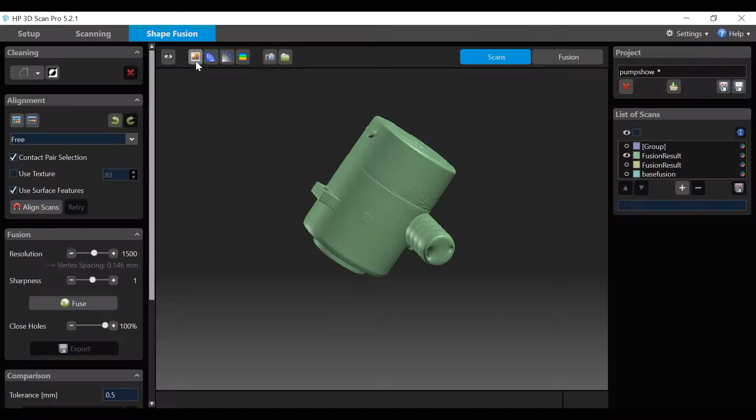This is part 3 of the video tutorials, which will demonstrate the scan alignment and fusion step of HP's 3D Structured Light Scanner Pro S3.

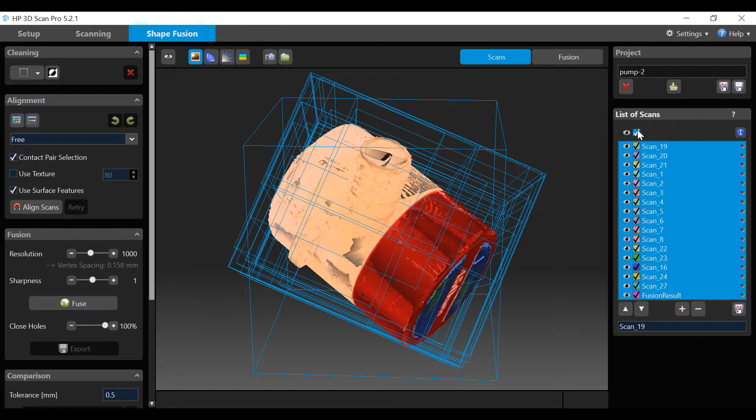Move to the Shape Fusion tab in the software. The Shape Fusion menu provides functions to clean, align, and fuse multiple scans into a single 360-degree model, then compare scans and measure distances if desired. The fused object can then be exported in various formats for 3D printing as an example.

Let's begin with some basic navigation. Further details are available in the HP online instructions.

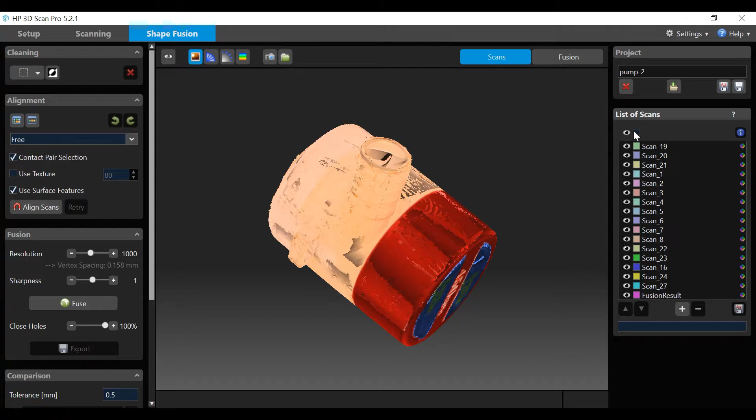Use Shape Fusion. Immediately under the alignment header, there are 4 icons: 1D and 2D, and undo and redo buttons. After selecting multiple scan images, you can use the 1D and 2D buttons to view and arrange them for easy manipulation. The redo and undo buttons work the same as similar icons in Windows applications.

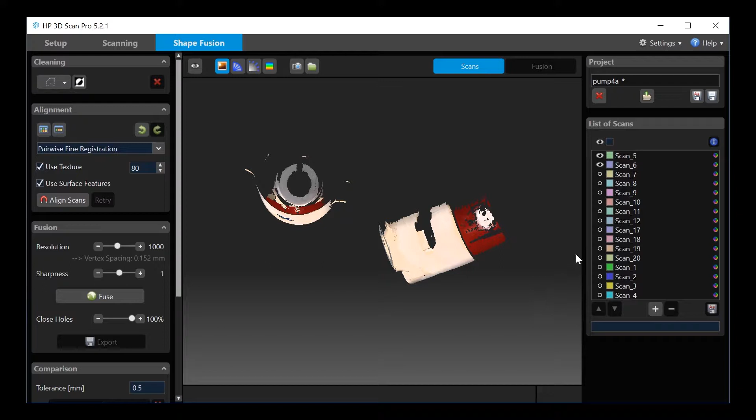Before getting into actual alignment and fusion, let's save the scan results as a project. All the scan files will be listed on the right-hand side of the screen. Click on the top selection box to select all scans. Click the Save Project As icon, name your project, and select location where it will be saved.

Close the project. Use the Load Project icon to quickly bring back any project into the working area of the software.

Another useful feature is the Import-Export function. Files can be exported in a variety of formats, including OBJ, STL, PLY, and 3MF.

Select a file and click the Export icon. Select your file extension and the location of where you want the files to go. Import works by dragging and dropping from Explorer or by using the plus sign below the list.

Lastly, you can click on a scan to view the additional menu options. Right-click on a scan to view menu. The most common ones used are Combine and Uncombined scans, which will be discussed later in the tutorial. Also, the Scan Properties icon displays all the mathematical properties of the scan.

The HP software does a great job of automatic alignment. Further mastery of this part of the 3D scanning process will yield better and better results as you use the scanner. Let's do some scan cleaning.

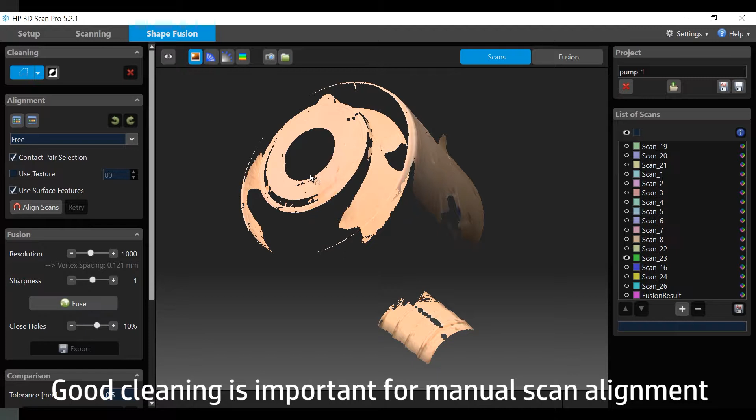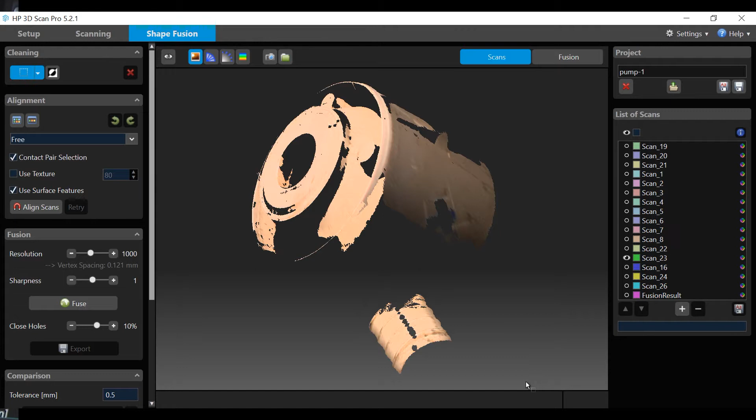Select a scan from the list to display it in the scan window. Move the scan around to detect any area of unwanted noise or scan interference. Click the drop-down arrow in the cleaning selection area and choose Rectangle Selection. Using the left mouse button, draw a rectangle on any area of the scan to be removed. Now click the red X to remove the area.

Now choose Polygon Selection and left mouse click to draw a shape. When finished, right mouse click. Click the red X to remove the area. The polygon selection is the normal selection when doing cleaning.

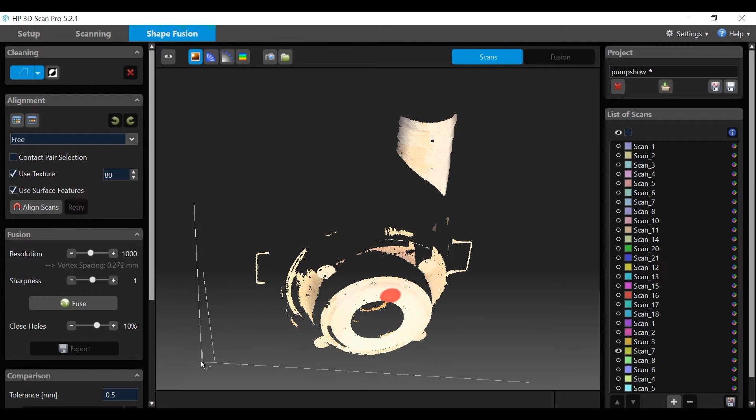Finally, select an area using the polygon tool and highlight an area of the scan you want to keep. Click the Invert selection. Clicking the red X in this instance will remove anything not selected.

Caution: you cannot undo cleaning, so do not save your project if you have modified any files in error.

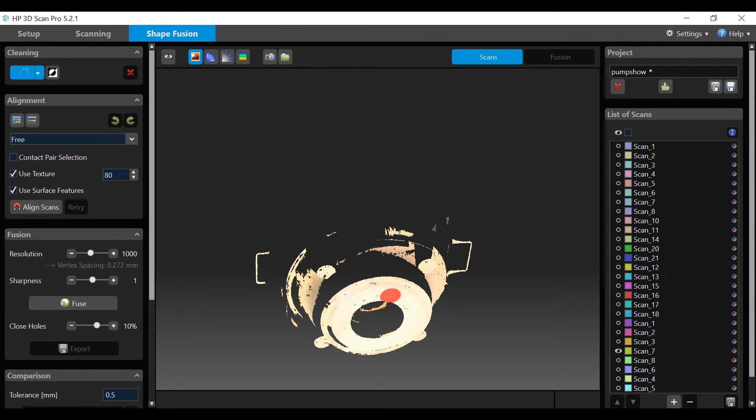Once you are satisfied with the cleaning process, proceed to scan alignment. During scanning with the automatic turntable and manual scan sequence, the software will align the scans automatically, where there is sufficient overlap between neighboring scans. Let's look at the finished scans and see what additional manual alignment may be required.

The alignment selections are free, around axis (not discussed here), pairwise fine registration (not discussed here), and global fine registration. Using free alignment, click the Use Texture and Use Surface Features boxes.

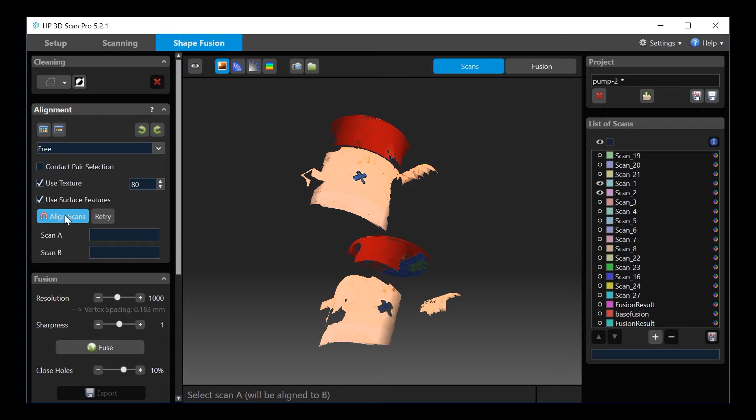Looking at the two scans in the scan window, manipulate them to orient for alignment. Click the Align Scans button. The cursor changes to a magnet icon with the letter A. Click on the scan you want to align, and the cursor changes to the letter B. Click on the scan you want to align to, and let the software process.

Next, let's look at contact pair selection. Pick two scans with unique features. Click Contact Pair Selection and click the Use Surface Features box. Click the Align Scans button. The cursor changes to a red circle.

Pick an area on the scan to be aligned and click the left mouse button. Now pick the same area on the scan you want to align to and click the mouse button. The software displays a line between the 2 points and processes using the features selected as reference points.

As you are successfully aligning scans, it is normally helpful to combine the scans to temporarily group them. Select 2 or more scans in the list of scans by checking the selection boxes. Right mouse click and select Combine Selected Scans. This groups them and allows you to use them as a single scan. Click Uncombine Scans to reverse the process.

Once you are satisfied with the cleaning and alignment process, select Global Fine Registration from the Alignment drop-down menu. Click Align and allow software to process prior to fusion. This is always the last required step prior to fusion.

When ready to fuse, make all scans you want in the fusion process visible. Start with a small resolution value, as fusion is a highly computational step, and higher resolutions will take longer and consume more memory. Set the sharpness value.

Default is 1. Higher values add noise. Negative values smooth the mesh. The Close Holes option will fill in gaps. This can be adjusted so you can set the density or percentage of the gap that needs to be closed.

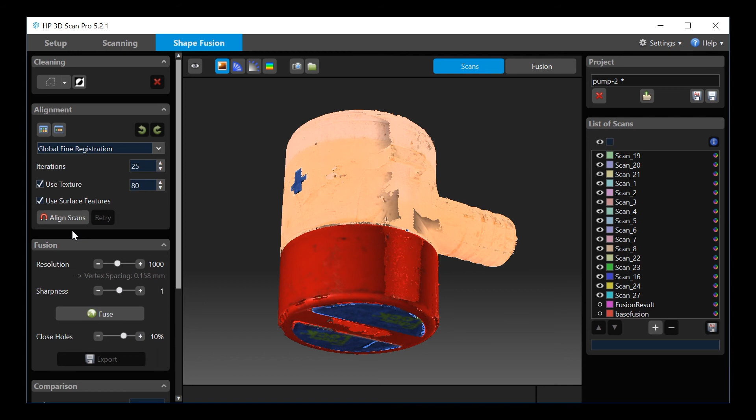Click Fuse. When fusion is complete, you can add it to the project file by clicking the Fusion Result Add to List icon. Don't forget to save your project file.

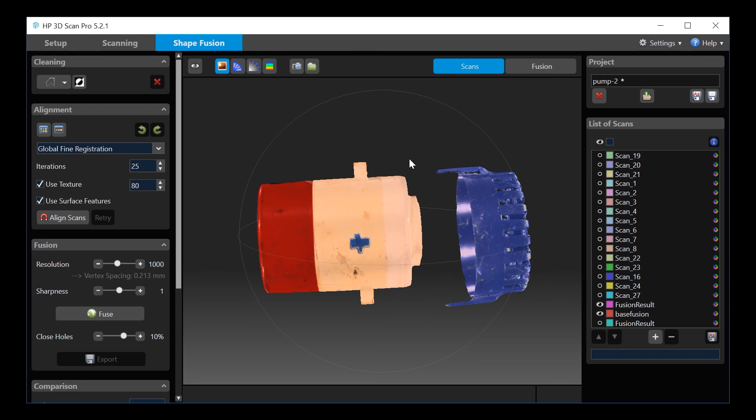This concludes the tutorials on the setup and operation of HP's 3D Structured Light Scanner. Continued use and experimentation with the hardware and software will yield great results for the user's project requirements.